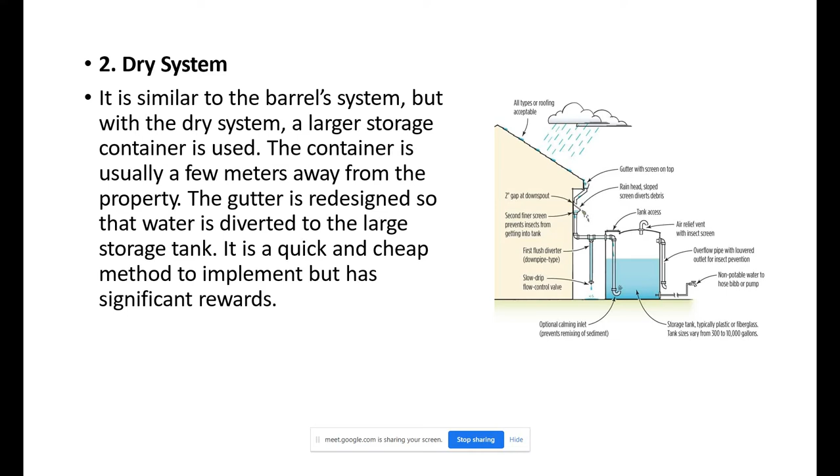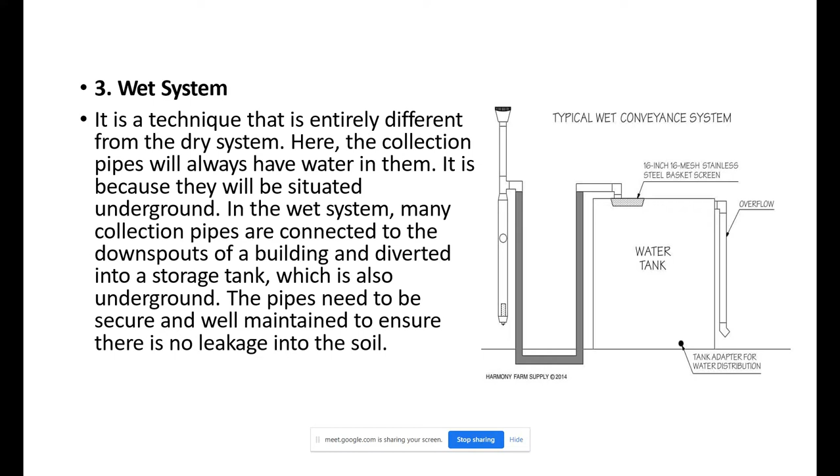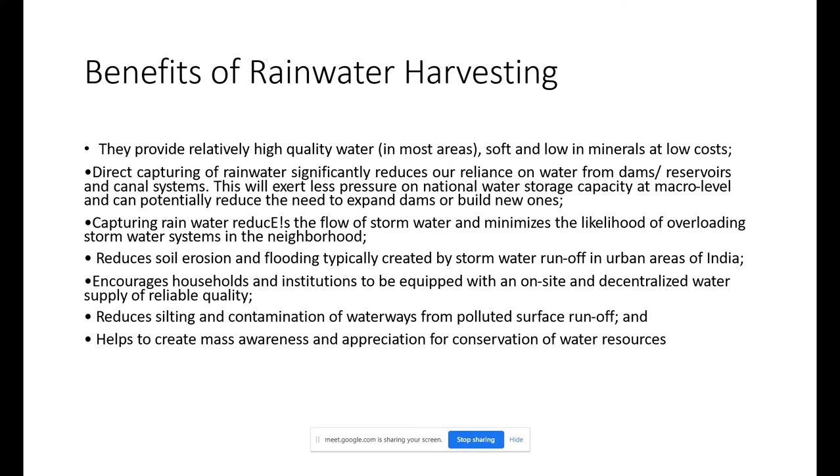So let me tell you the benefits of rainwater harvesting. They provide relatively high quality water, soft and low in minerals, at low cost. Capturing rainwater reduces the flow of stormwater and minimizes the likelihood of overloading stormwater systems in the neighborhood. It reduces soil erosion and flooding typically created by stormwater runoff in urban areas of India. It reduces silting and contamination of waterways from polluted surface runoff, and helps create mass awareness and appreciation for conservation of water resources. So that was all about my presentation.

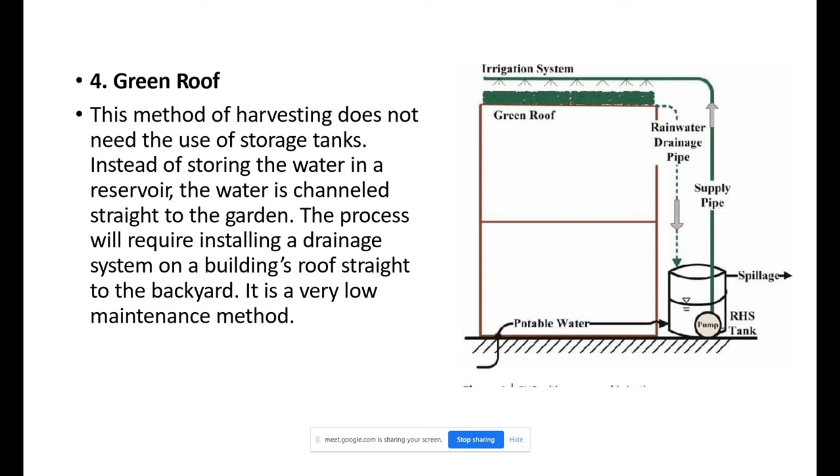Okay, do you have any thought? Yes, ma'am. In our houses we can use tanks to store water, and then we can reuse it again and again.

Okay. Something like rain barrels. Okay.

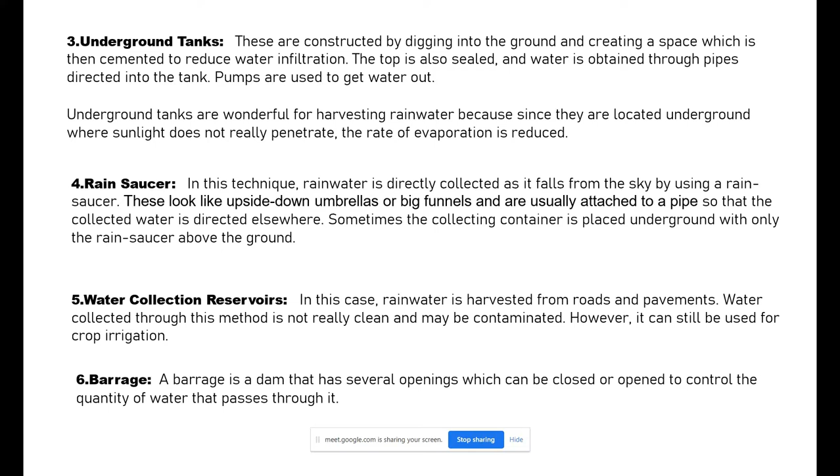Next is barrage. A barrage is a dam that has several openings which can be closed or opened to control the quantity of water that passes through it.

Now moving to the advantages of rainwater harvesting. The first one is easy to maintain. Systems for the collection of rainwater are based on simple technology. The overall cost of their installation and operation is much lesser than that of water purifying or pumping systems. Maintenance requires little time and energy. The result is the collection of water that can be used in substantial ways even without purification.

Second is independent water supply. Rainwater harvesting provides an independent water supply where clean water is costly or difficult to come by. Rainwater harvesting is a critical source of clean water and increases the quantity of potable drinking water available.

Third is reducing water bills. Water collected in the rainwater harvesting system can be put to use for several non-drinking functions as well. For many families and small businesses, this leads to a large reduction in their utility bill.

Fourth is suitable for irrigation. Rainwater is free from many chemicals found in groundwater, making it suitable for irrigation and watering gardens.

Fifth is reduces demand on groundwater. With an increase in population, the demand for water is also continuously increasing. The result is that many residential colonies and industries are extracting groundwater to fulfill their daily demands.

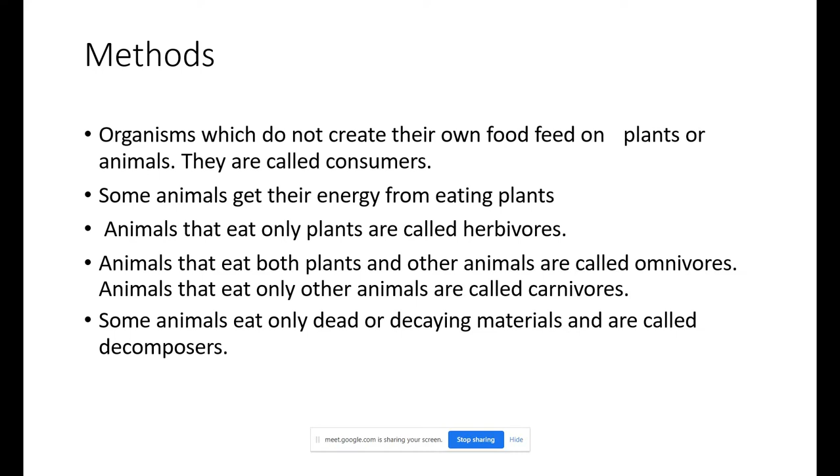The second benefit is the ecological benefit. As we have gained water from the rain, we can use it to recharge the underground water. The ecological benefits of rainwater harvesting are immense. It minimizes the impacts of flooding by funneling the rainwater into large tanks.

For example, when rain occurs, it usually causes soil erosion when the rain force is huge, so we can use that water to store and avoid soil erosion. It also acts as an adequate means for irrigation purposes, like growing crops and various other uses, and it also reduces the demand on groundwater, as people will need less water from the ground.

Extending this further, we have a similar topic: water resource management. Till now we have discussed what rainwater harvesting is, and now we will discuss water resource management. If we already have some water, how can we manage those water resources to use it to its full potential while minimizing water demand.

It is basically an activity of planning, developing, distributing, and managing the optimum use of water resources. The keyword here is optimum - how we can utilize the current water resources to its best. It is a subset of water cycle management, like hydrology, but the scale of management is low.

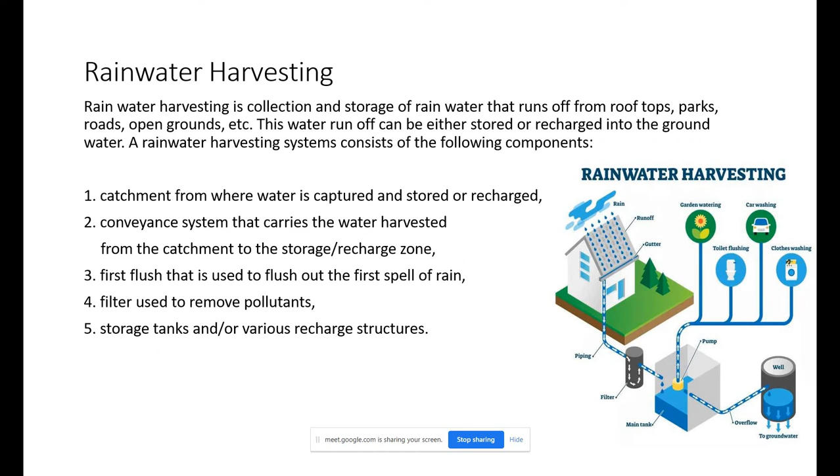The second step we can perform is, at our household level, make efficient use of water, the optimum use of water resources. So what we can do in our households is reuse water—for example, we get rainwater, and we can make a funneling system so that we can store that water and use it for common purposes.

And the third step we can do is host small public events, like in a society, where we can encourage people to help build better infrastructure for water resource management.

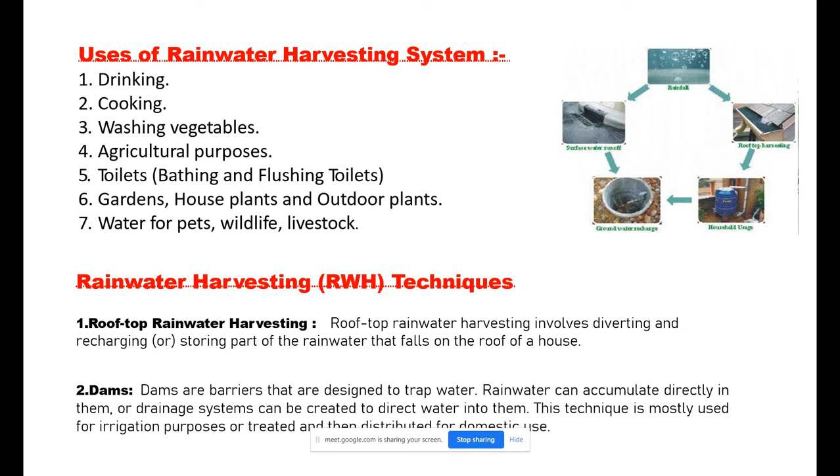What are the advantages of rainwater harvesting? It is easy to maintain. The overall cost of installation and operation is much lesser than that of a water purifying or pumping system.

Independent water supply. Rainwater harvesting provides an independent water supply where clean water is costly or difficult to come by, reducing water bills. Water collected in the rainwater harvesting system can be put to use for several non-drinking functions.

Suitable for irrigation. Rainwater is free from many chemicals found in groundwater, making it suitable for irrigation and watering gardens. Reduced demand on groundwater: with increase in population, the demand for water is also increasing, resulting in many residential colonies and industries extracting groundwater.

During the rainy season, rainwater is collected in large storage tanks. It also helps in reducing flooding in some low-lying areas.

What are the disadvantages of rainwater harvesting? It has unpredictable rainfall, initial high cost, storage limits, and certain roof types may seep chemical or animal droppings contaminate the water.

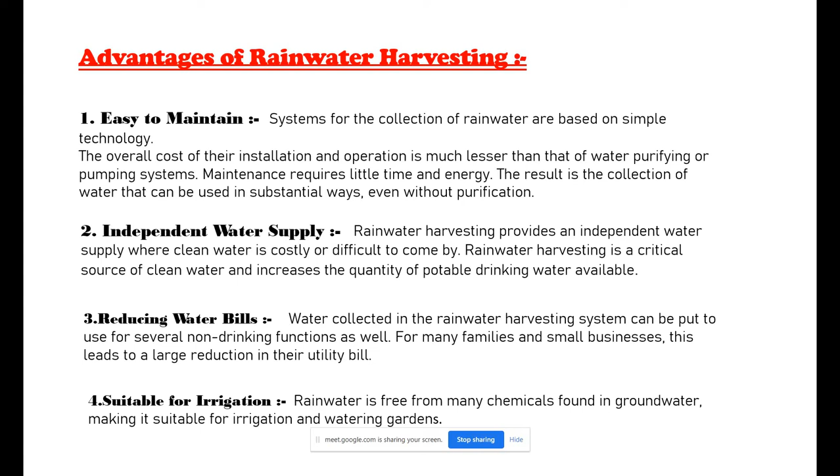Okay, how are you going to contribute, ma'am, in this area, Shivam?

Yes, ma'am. Do you have any suggestion for better water resource management?

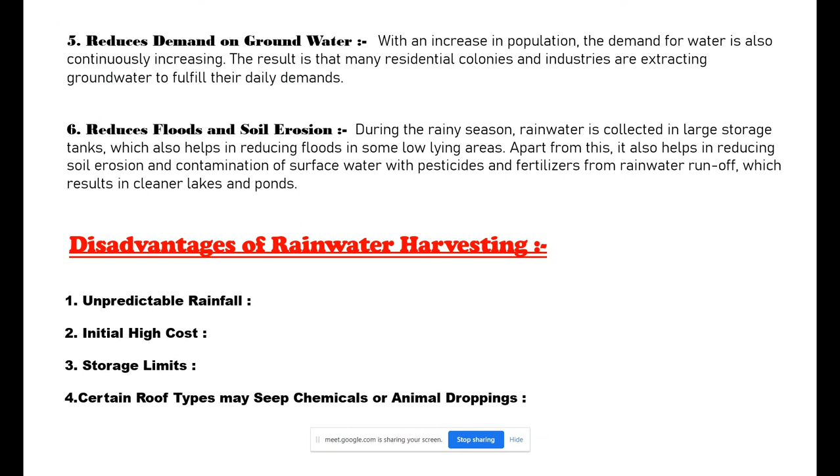Ma'am, every village house should have a rainwater harvesting system in their houses, and we can also dig.

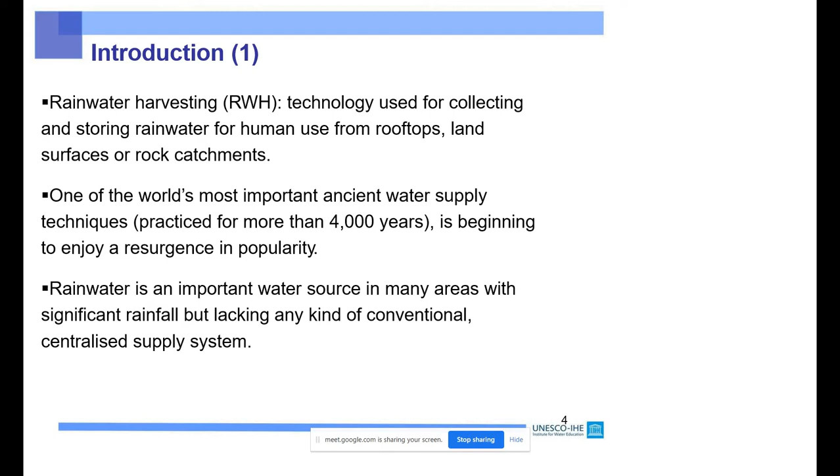Rainwater is also a good option in areas where good quality fresh surface water or groundwater is lacking. It could be used as a supplement to piped water supply, for example for toilet flushing, washing, and garden spraying.

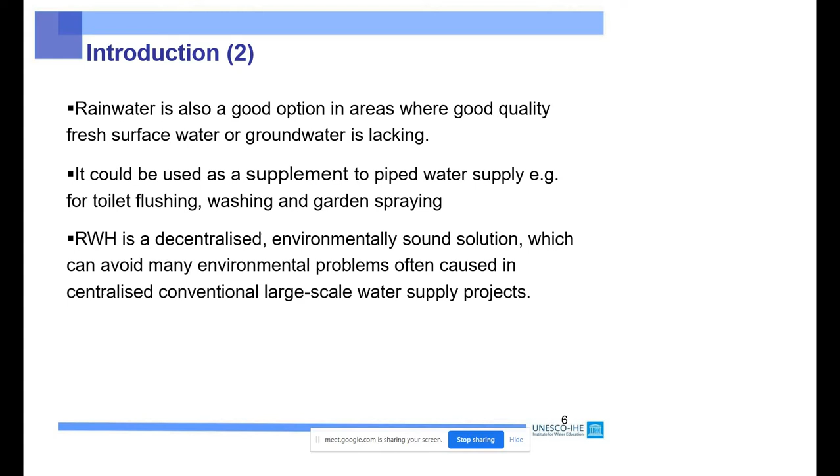Types of rainwater harvesting systems: roof catchment, a simple roof water collection system for households; large systems for educational institutions; roof water collection systems for high-rise buildings in urbanized areas; ground catchment; rock catchment; and collection of storm water in urbanized catchments for recharge. So here are some diagrams.

How about several types of rainwater harvesting. First one is domestic, which we can use in our home for storing rainwater.

Ma'am, yes, please. So here you can see there is a storage tank and the water from the roof seeps down to this tank, and this water can be used in washing, agriculture, for flowers, or for water uses anywhere.

And then comes the ground catchment system. Here a huge soil area is used to collect the water. And then the ground catchment system and rock catchment system.

In the rock catchment system, the reservoir is high above, on the rocky catchment surface, and then this water reservoir is used to supply water to the cities or any village.

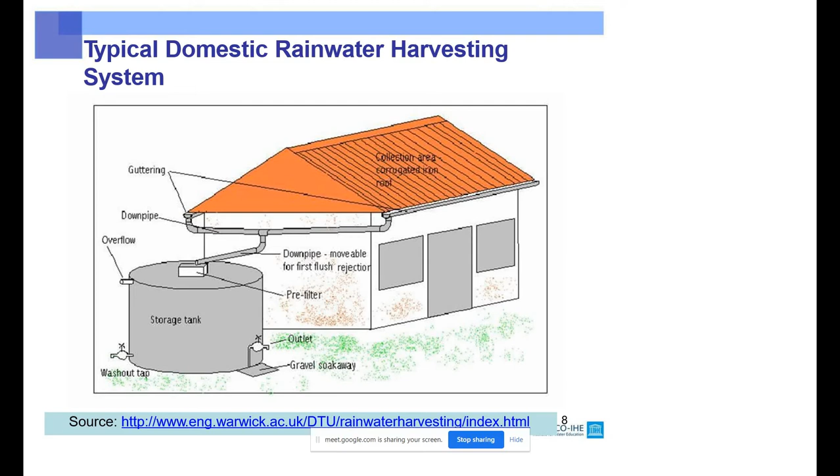Ma'am, next slide. What is the ground catchment system, ma'am, please?

Ma'am, here the used land area is used to collect the water, and then this collected water is stored into the ferro cement tank. This is a cemented area, I think.

Yes, ma'am. This is an underground tank, and the land above it collects the water, or the slope type area. Ground catchment system.

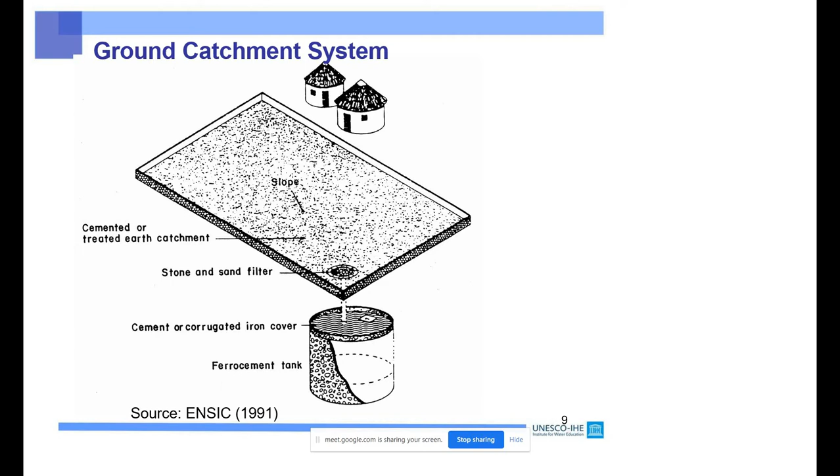This is the structure showing how we can make that land store more water. This is the diagram. Next.

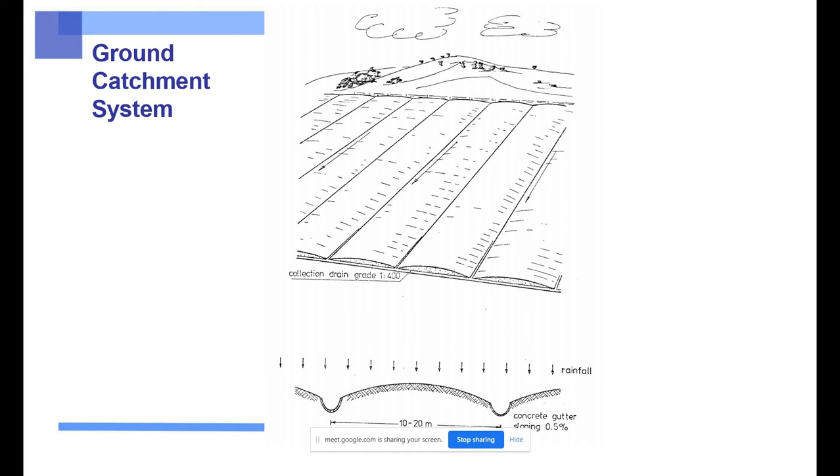This is the rock catchment system. Here the reservoir is above the land, at a higher sea level, and the water from this reservoir gets to different villages and cities. Next.

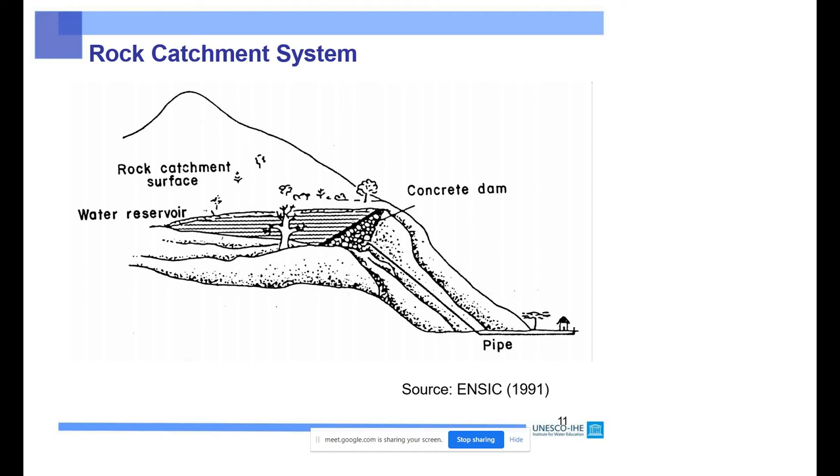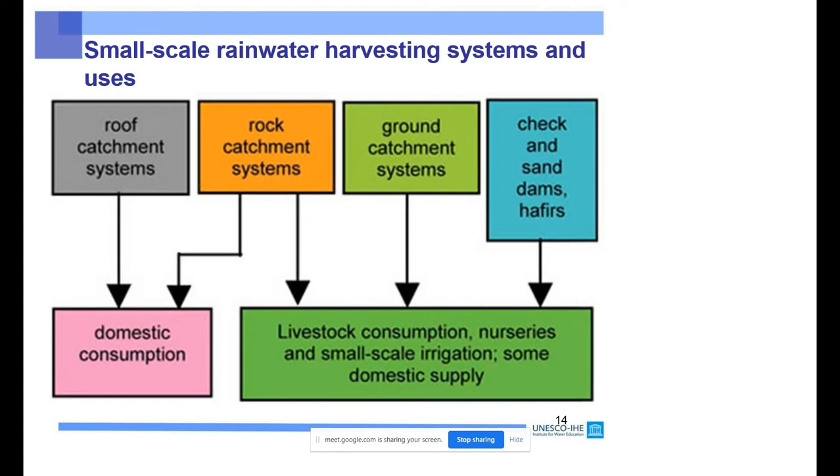So I think everyone has discussed about that. Yes. Next. Ma'am, next.

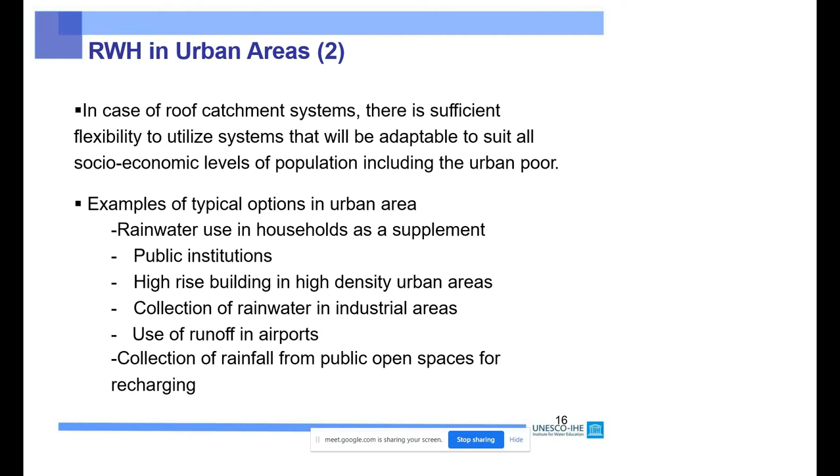In case of roof catchment systems, there is sufficient flexibility to utilize a system adaptable to suit all socio-economic levels of population, including the urban poor. Examples of typical options in urban areas: rainwater used in households as a supplement, public institutions, and high-rise buildings in high-density urban areas.

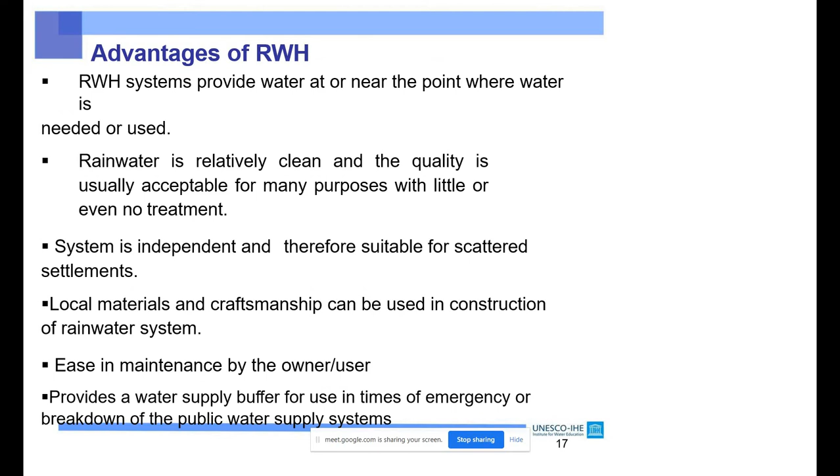Advantages of rainwater harvesting: the system provides water at or near the point where it is needed or used. Rainwater is relatively clean and usually acceptable for many purposes with little or no treatment. The system is independent and therefore suited for scattered settlements, with ease of maintenance by owner and user.

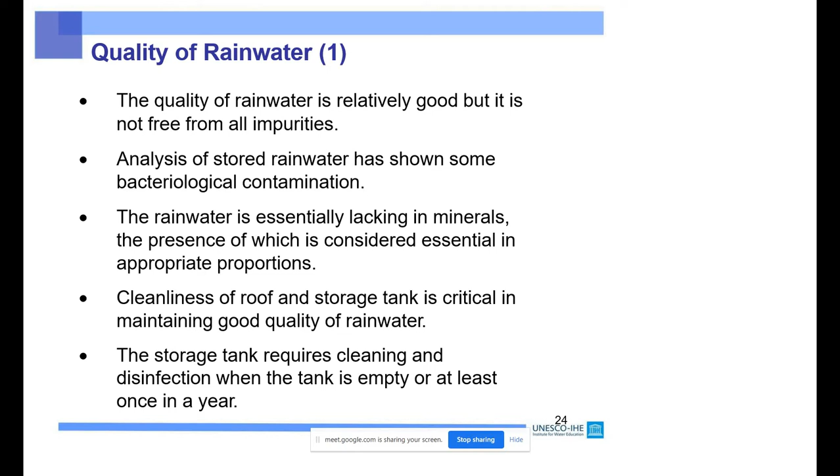Public awareness and education are essential in order to improve acceptance of rainwater collection.

...in the ground stores the water, which can be used at times when there is water scarcity or no rainfall.

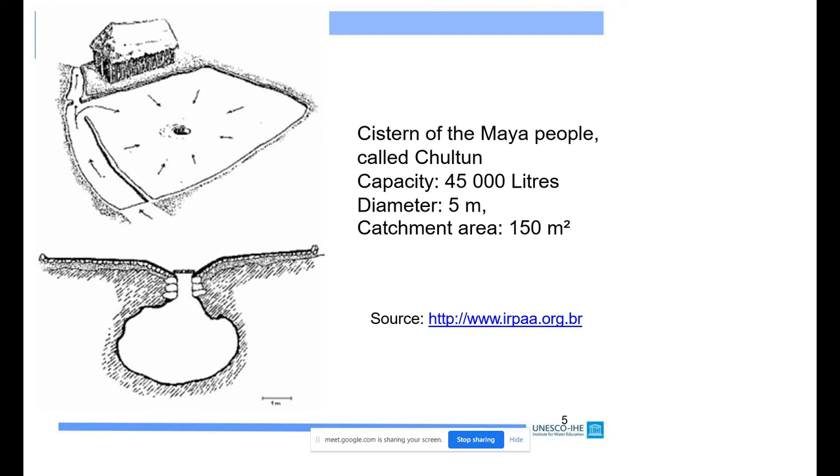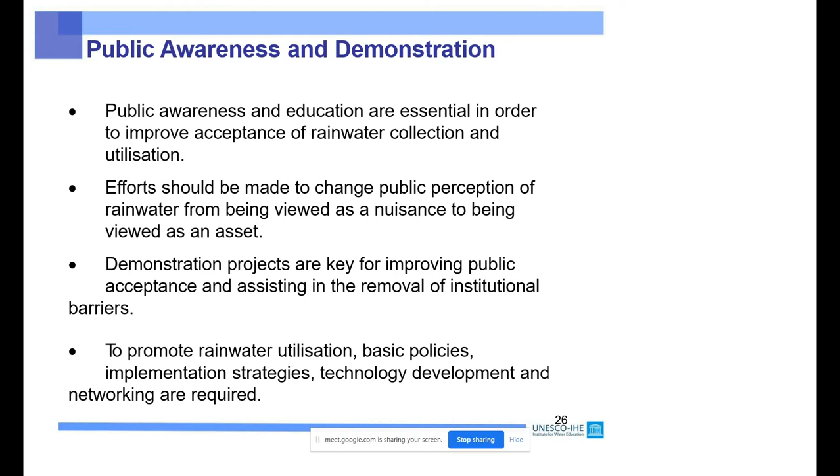Do you have any suggestion? My suggestion is that more and more people should try rainwater harvesting in their homes or big buildings, so that the groundwater level is maintained. Otherwise, if we keep using groundwater at this speed, it will get depleted very soon. So this is a very important time, and you have to spread awareness for this.

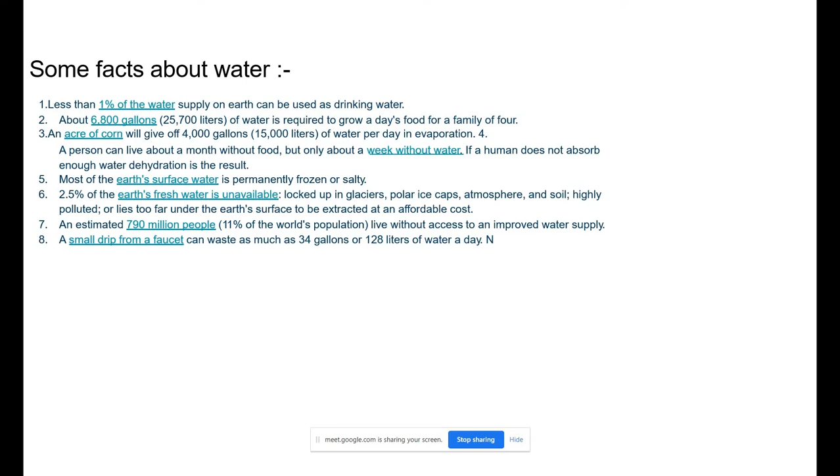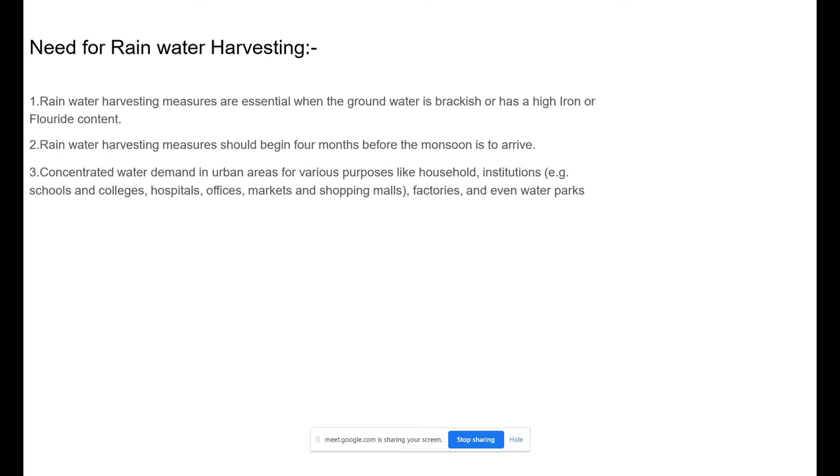What is the need for rainwater harvesting? Rainwater harvesting measures are essential when groundwater is brackish or has high iron or fluoride content. These measures should begin 4 months before the monsoon arrives, due to concentrated water demand in urban areas for households, institutions, factories, and even water parks.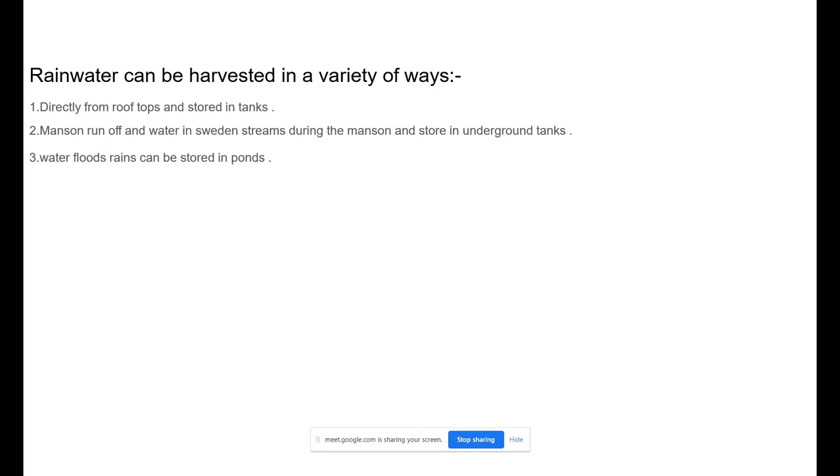Rainwater can be harvested in a variety of ways. First, directly from rooftops and stored in tanks. Second, monsoon runoff and water in streams during the monsoon stored in underground tanks. Third, water from flood drains can be stored in ponds.

The benefits include: less cost, helps in reducing the water bill, decreases demand for water, reduces the need for imported water, and promotes both water and energy conservation. It improves the quality and quantity of groundwater, does not require a filtration system for landscape irrigation, and this technology is relatively simple, easy to install and operate. It reduces soil erosion, storm water runoff, flooding, and pollution of surface water with fertilizers, pesticides, metals, and other sediments.

The last point is that it is an excellent source of water for landscape irrigation, with no chemicals or dissolved salts, and free from all minerals.

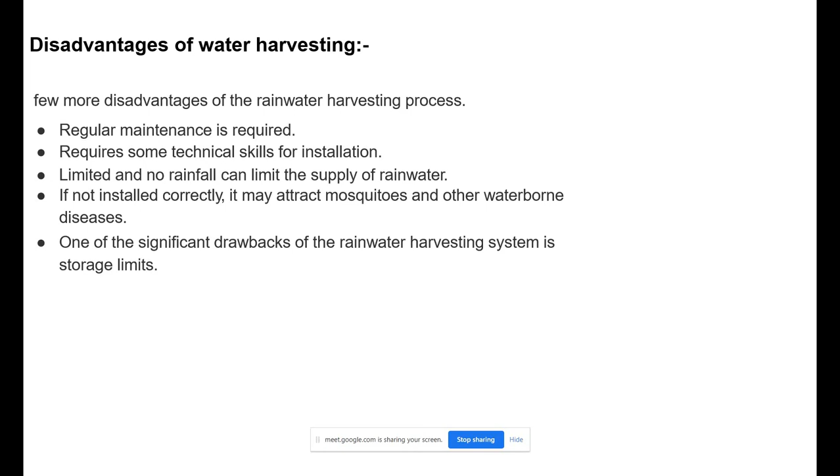Yes ma'am, good afternoon ma'am. Today's topic presented is rainwater harvesting and management of water resources.

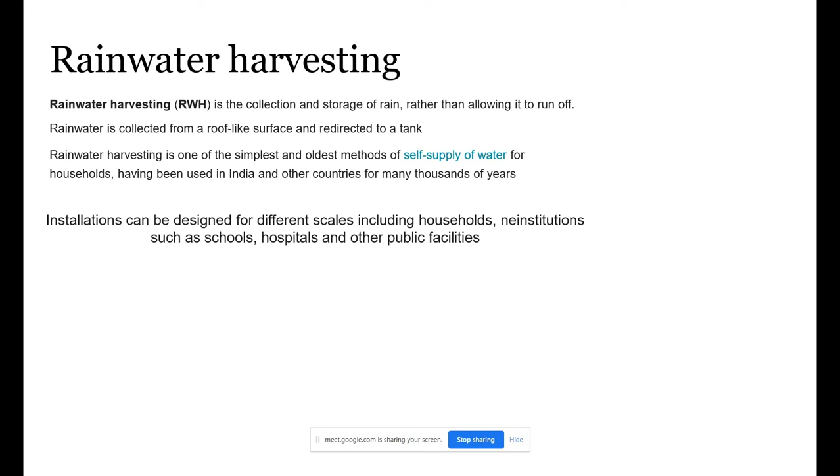Firstly, what is rainwater harvesting? Rainwater harvesting is the collection and storage of rain rather than allowing it to run off. Rainwater is collected from a roof-like surface and redirected to a tank. It is one of the simplest and oldest methods of self-supply of water for households, having been used in India and other countries for many thousands of years. Installations can be designed for different scales, including households and institutions such as schools, hospitals, and other public facilities.

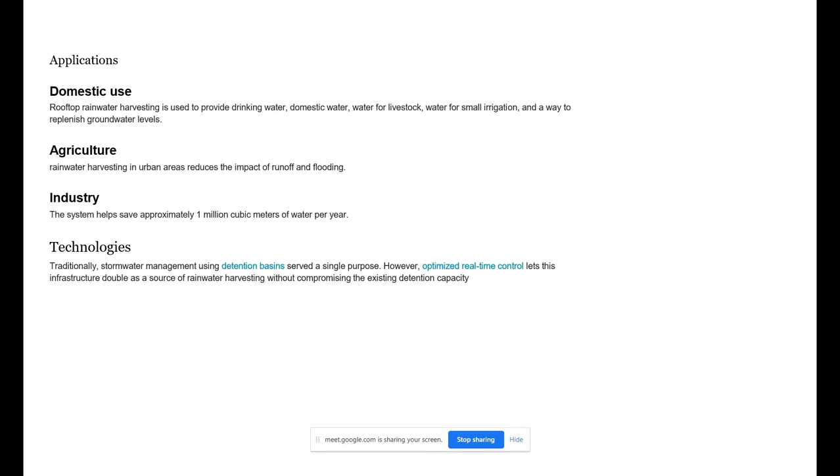Application of rainwater harvesting: domestic use. Rooftop rainwater harvesting provides drinking water, domestic water, water for livestock, water for small irrigation, and a way to replenish groundwater levels. In urban areas it reduces the impact of runoff and flooding. In industry, the system helps save approximately 1 million cubic meters of water per year. Traditionally, storm water management using detention basins served a single purpose, but optimized real-time controls let this infrastructure double as a source of rainwater without compromising the existing detention capacity.

Advantages of rainwater harvesting: it provides independent water during regional water restrictions in developed countries, and is often used to supplement the main supply. It provides water when a drought occurs, can help mitigate flooding of low-lying areas, and reduces demand on wells, which may enable groundwater levels to be sustained. It increases the availability of water during dry seasons by raising the level of dried bore wells and wells. Surface water supply is readily available for various purposes, thus reducing dependence on underground water.

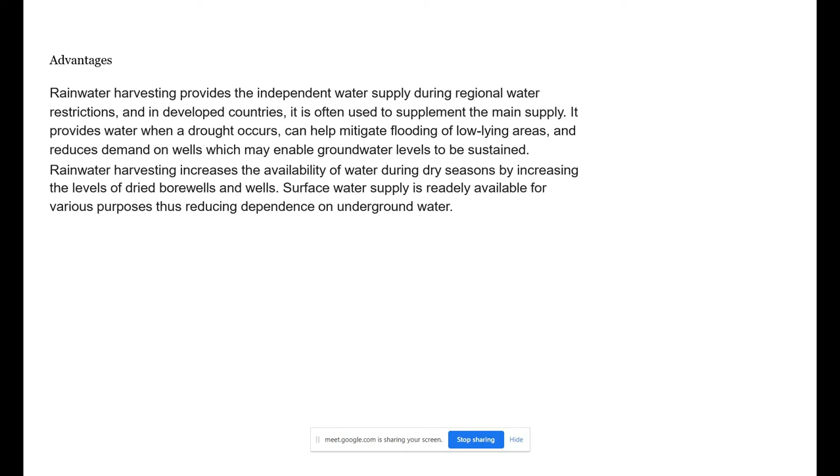Limitation of rainwater harvesting: it is a widely used method of storing rainwater in countries with drought characteristics. Several pieces of research have developed different criteria and techniques to select suitable sites for harvesting rainwater. Some research identified suitable sites for the potential erection of dams. The South African Water Research Commission has supported research into rainwater harvesting; studies in arid, semi-arid, and humid regions have confirmed that techniques such as mulching, pitting, ridging, and modified run-on plots are effective for small-scale crop production.

Thank you ma'am. Okay, do you have any suggestion?

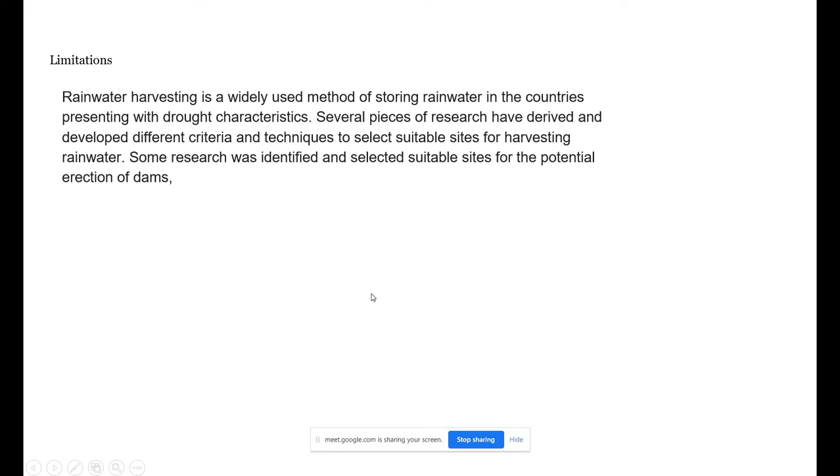Ma'am, in our homes we make tanks to store the rainwater.

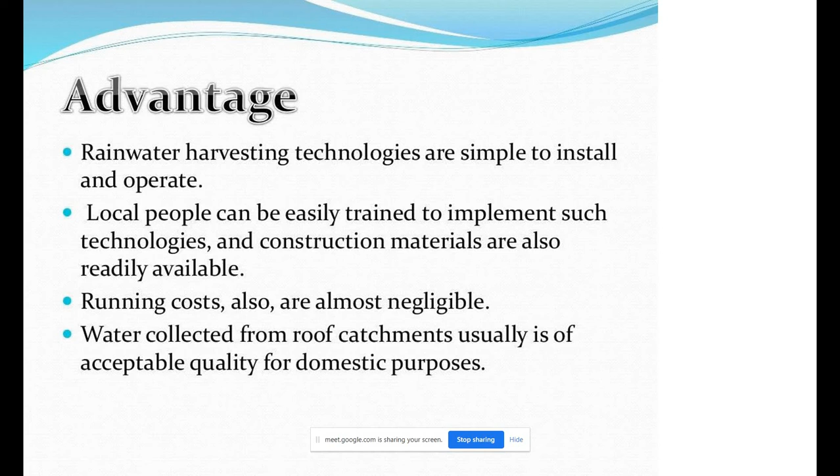Now, how can we harvest rainwater? There are two ways: first is surface runoff harvesting, and second is rooftop rainwater harvesting. In urban areas, rainwater flows away as surface runoff. This runoff could be caught and used for recharging aquifers by adopting appropriate methods.

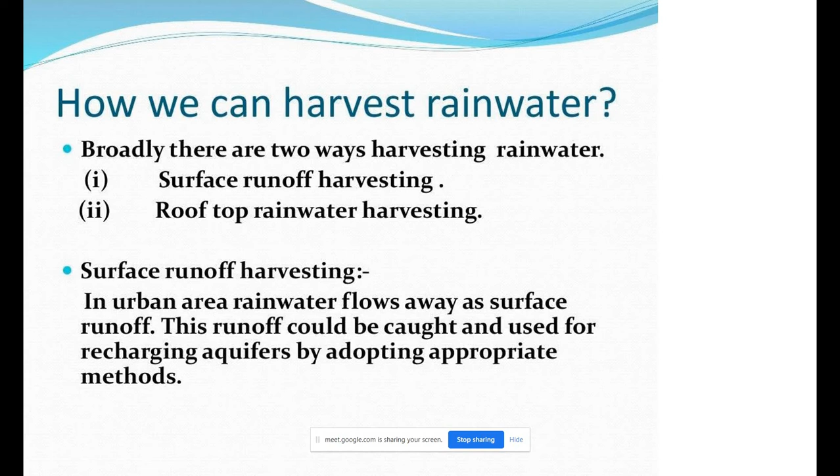Now let's see rooftop rainwater harvesting. It is a system of catching rainwater where it falls. In rooftop harvesting, the roof becomes the catchment and the rainwater is collected from the roof of the house or building. This method is less expensive and very effective.

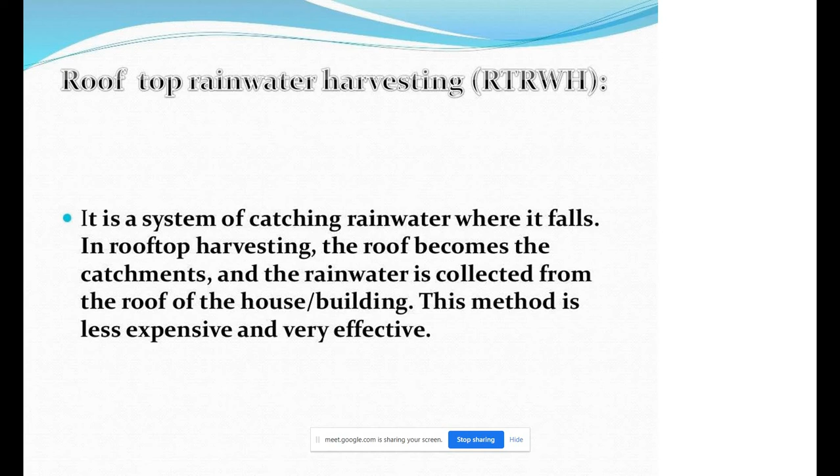Now let's see the components of rooftop rainwater harvesting: first is catchment area, second transportation, third first flush, fourth storage system, fifth delivery system, and sixth is filtration system.

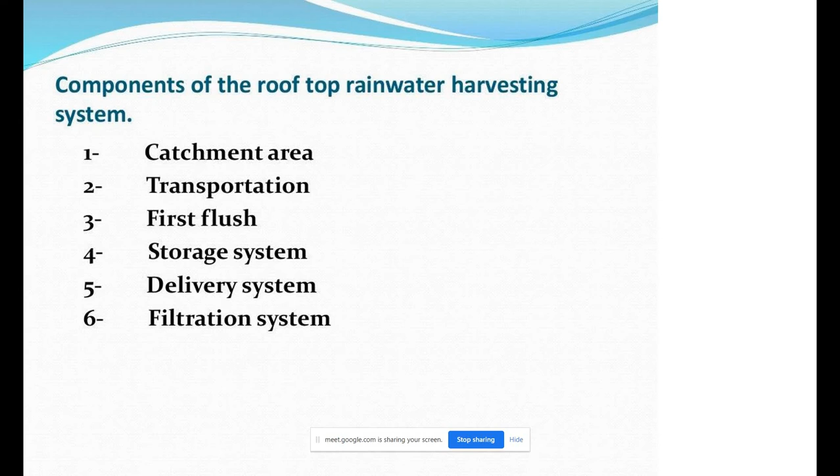Now let's see the figure of catchment area. This is the figure for catchment area where water is stored on top of the house, and then transportation, where the water from the top is stored in the ground.

This is transportation. First flush is a device used to flush off the water received in the first shower. The first shower of rain needs to be flushed off to avoid contaminating storable or rechargeable water by probable contaminants from the atmosphere and the catchment roof. It also helps in cleaning silt and other material deposited on the roof during the dry season. Provisions for a first rain separator should be made at the outlet of each drain pipe.

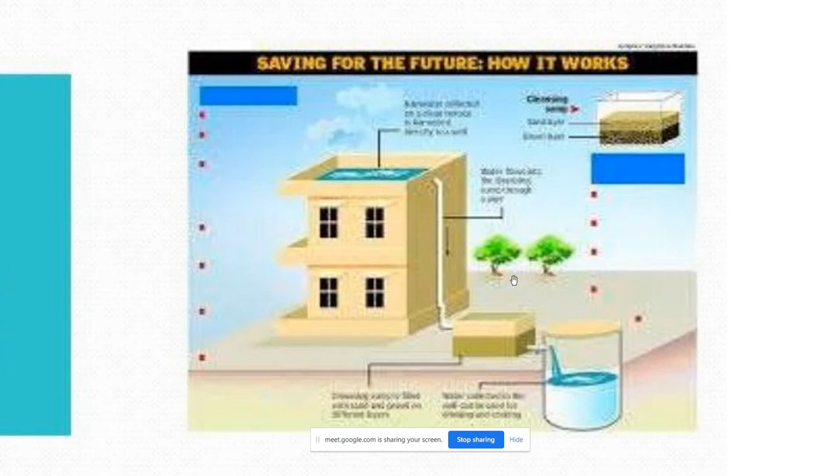Now let's see the storage system. Here is the image for the storage system, showing how we store the water in the ground. After that, the delivery system shows how water is stored in tanks.

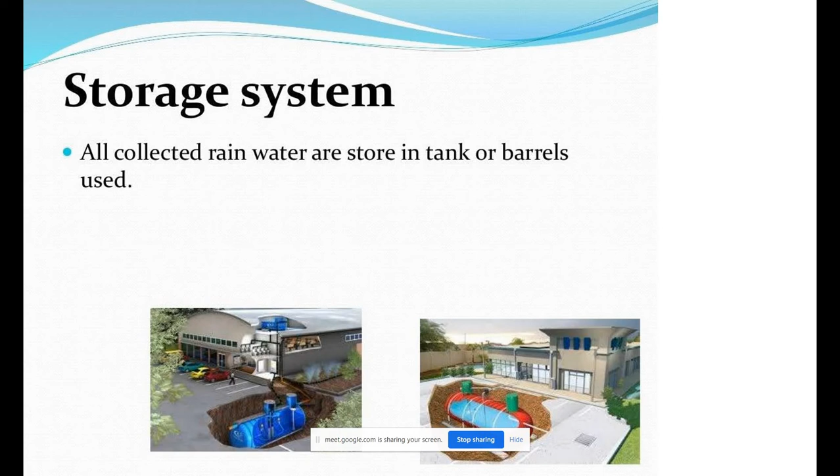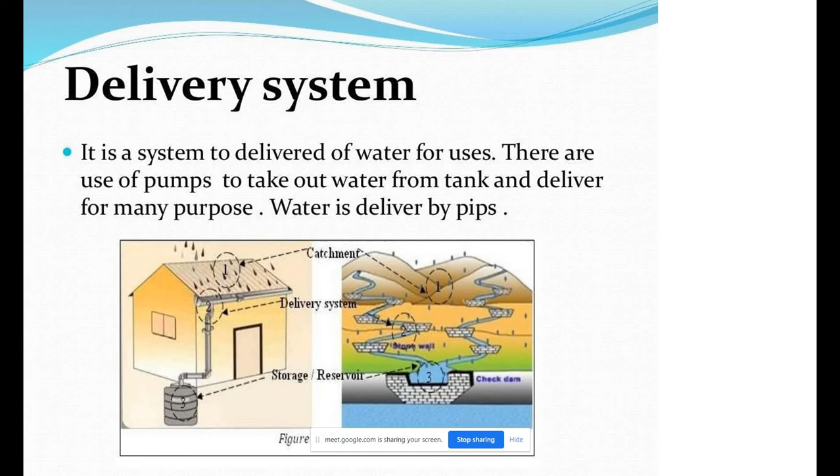Filtration is used for treatment of water to effectively remove turbidity, color, and microorganisms. After the first flush of rainfall, water should pass through filters. There are different types of filters in practice, but the basic function is to purify water. Here are some techniques of filtration: first is the sand gravel filter.

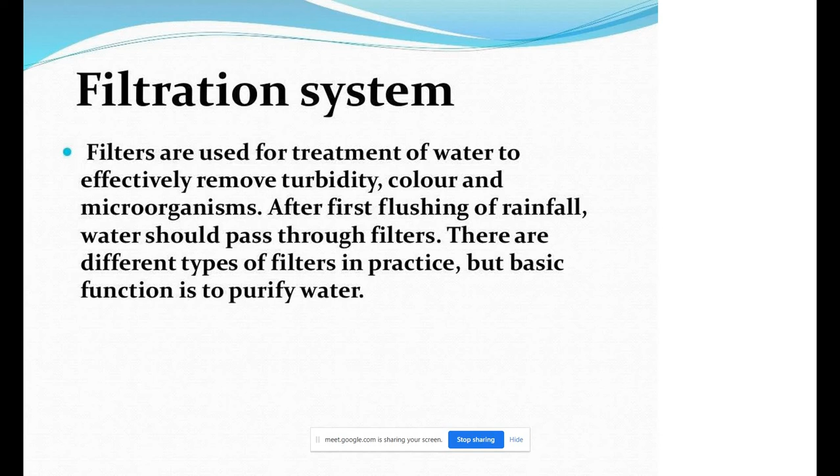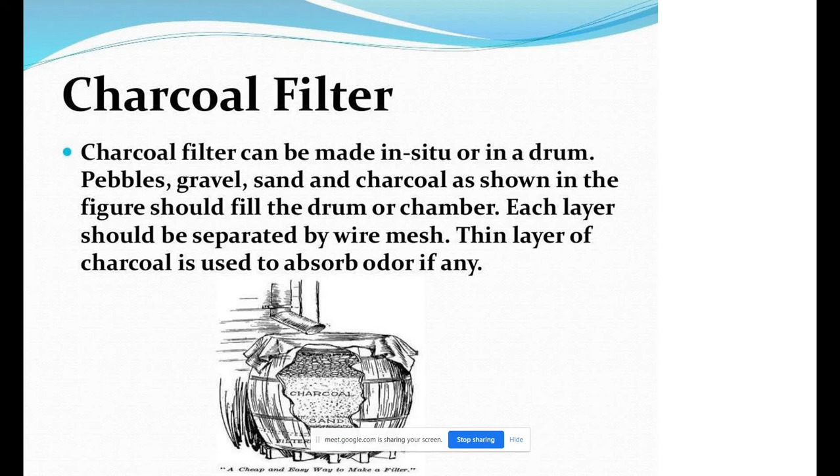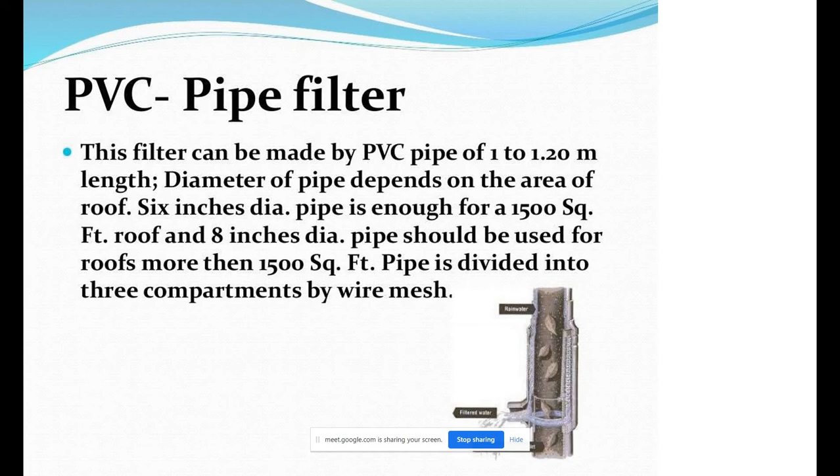Why do people harvest rainwater? Rainwater is a precious resource due to increase in demand from our ever-growing population. Changes in rainfall patterns in the UK have seen both drought conditions and flooding. Rainwater harvesting can provide around 50% of family water needs. This not only saves water but saves money and reduces our impact on the environment. To inculcate a culture of water conservation and reduce soil erosion, rainwater harvesting is compulsory.

Okay, how are you going to contribute in this area, Aman?

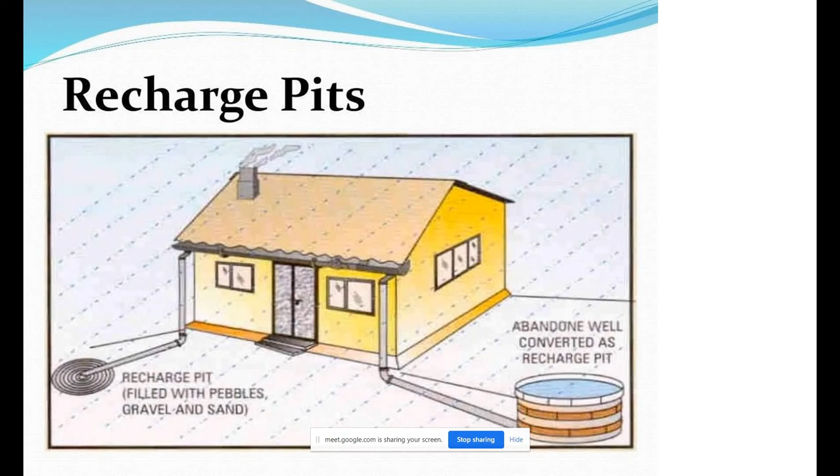Yes ma'am, there is a ground already in my area where all the water from domestic purposes is stored, and which is again refilled in the groundwater.

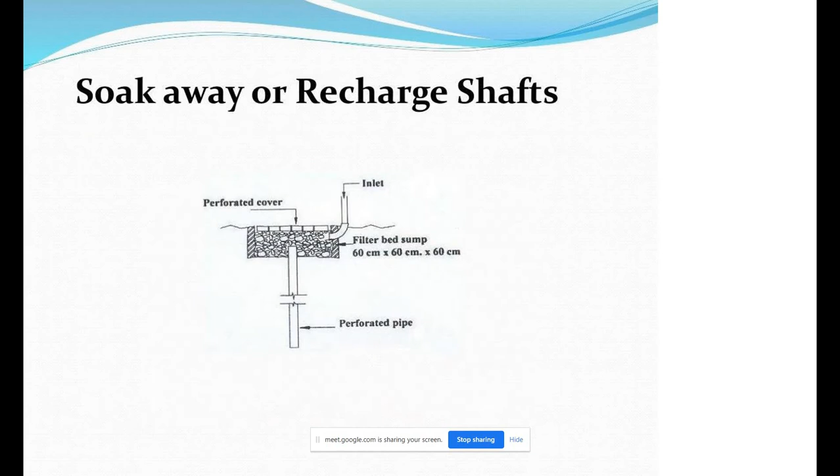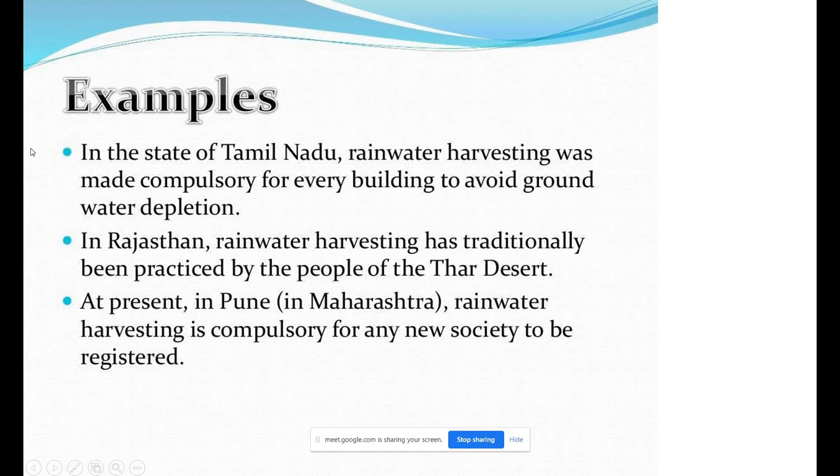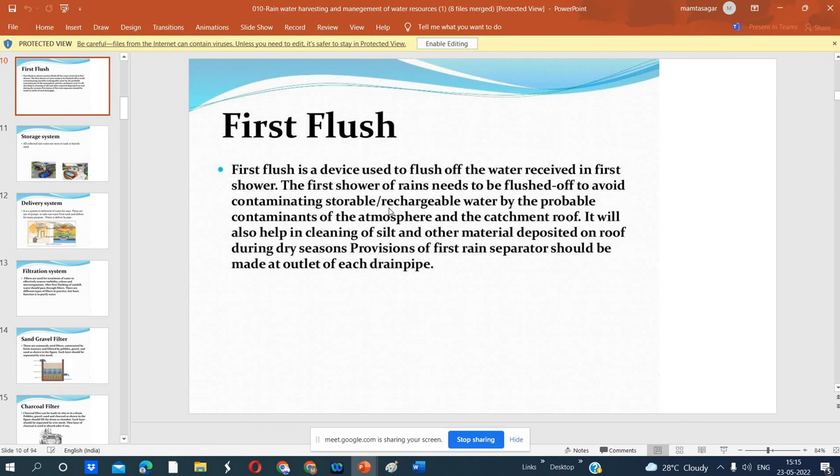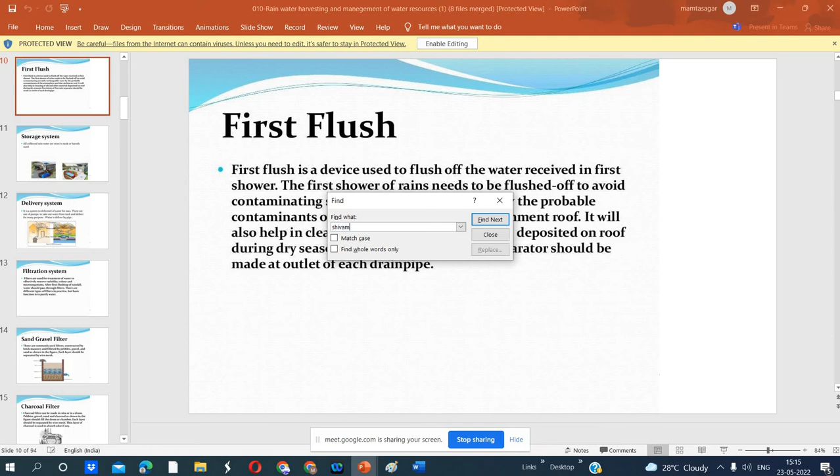Okay, now it is over. Okay, thank you Shivam Verma, roll number 58. Is your slide here or not? Presentation, yes ma'am, present. Is your PPT here in this slide or not? Where is it? Yes ma'am, PPT present ma'am. In the meantime I am asking from you. What's your name? Shivam Verma. Do we have the slide of Shivam Pandey? I don't have your slides. Ma'am, there are slides of Shivam Verma. Okay, but I think it is not here. Ma'am, I have submitted the slides in Google Classroom. When did you submit? Ma'am, yesterday. Okay, these are the previous slides, huh? Shivam Pandey, so only Shivam Pandey's presentation is here. This is the presentation of... okay, what is your roll number? 58. 58, okay.

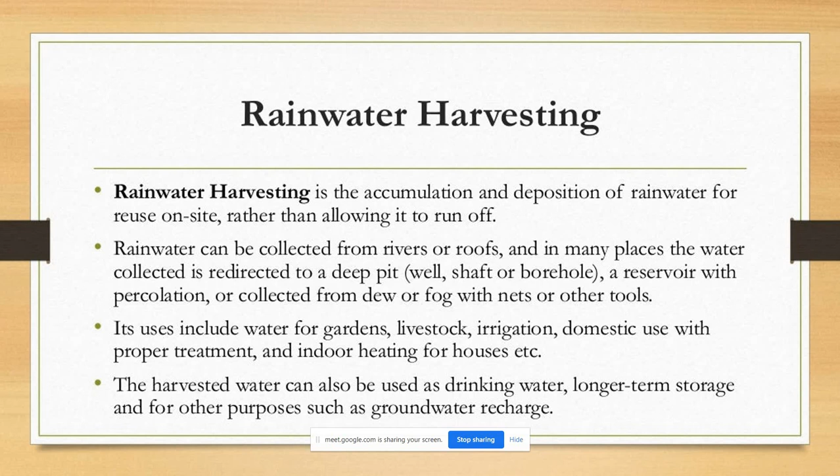Ma'am, can you skip to the next slide? Methods of rainwater harvesting slide. This is your slide, no? Method, components of roof. Method of rainwater harvesting. Second slide. Ma'am, it is the third slide.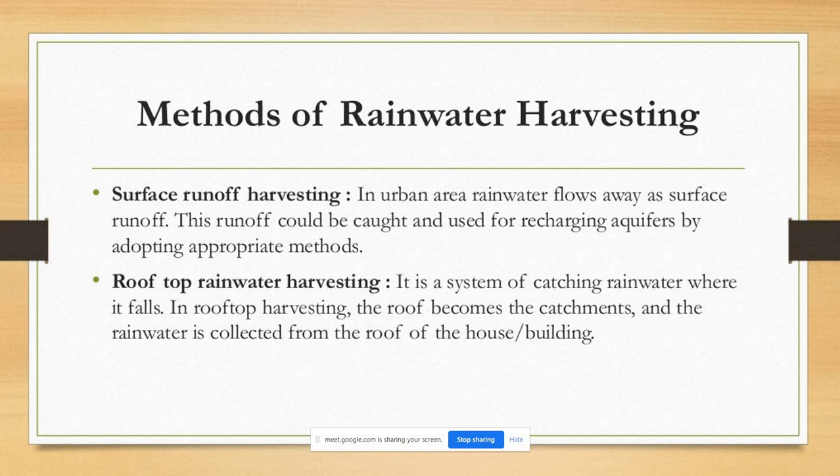Ma'am, next slide. First flush is a device used to flush off the water received in the first shower. In the filter, there is always some skepticism regarding rooftop rainwater harvesting since doubts are raised that rainwater may contaminate groundwater. Filters are used for treatment of water to effectively remove turbidity, color, and microorganisms.

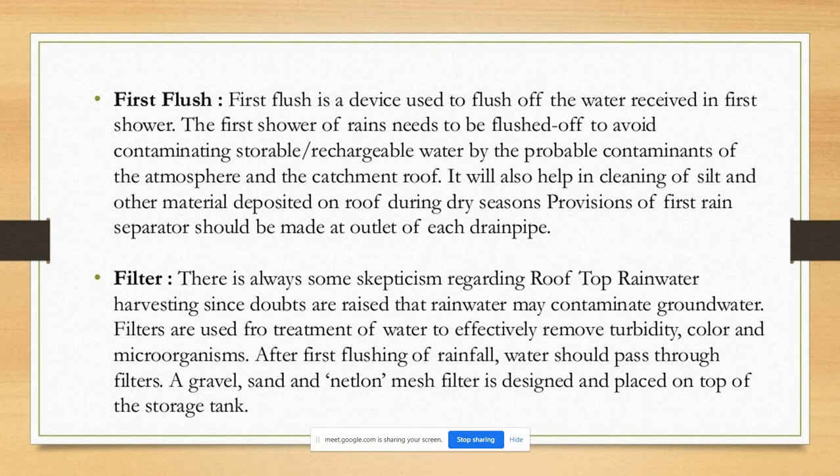Ma'am, next slide. Quality: the concentration of contaminants is reduced significantly by diverting the initial flow of runoff water to waste. Supplying rainwater that has gone through preliminary filtration measures for non-potable water uses such as toilet flushing, irrigation, and laundry may be a significant part of a sustainable water management strategy.

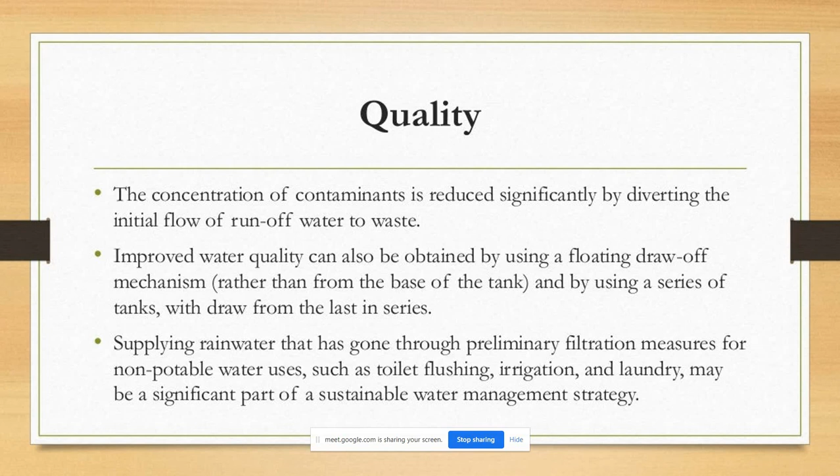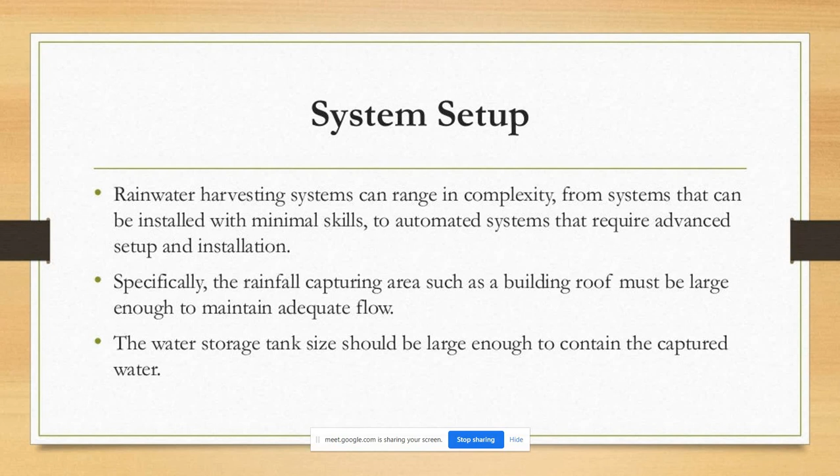Next slide. System setup: rainwater harvesting systems can range in complexity from systems that can be installed with minimum skill to automated systems that require advanced setup and installation. Specifically, the rainfall capturing area, such as the building roof, must be large enough to maintain adequate flow. The water storage tank should be large enough to contain the captured water.

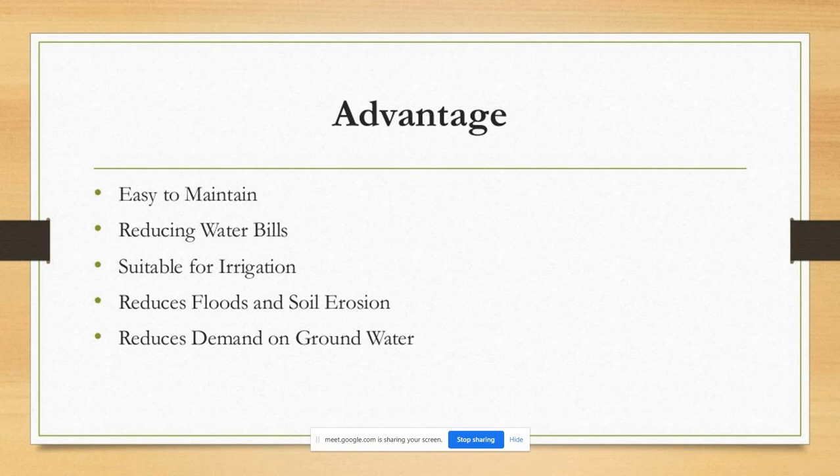The advantages are: easy to maintain, reducing water bills, suitable for irrigation, reduces floods and soil erosion, reduces demand on groundwater. The disadvantages are: unpredictable rainfall, initial high cost, and regular maintenance required. Thank you, this is my slide.

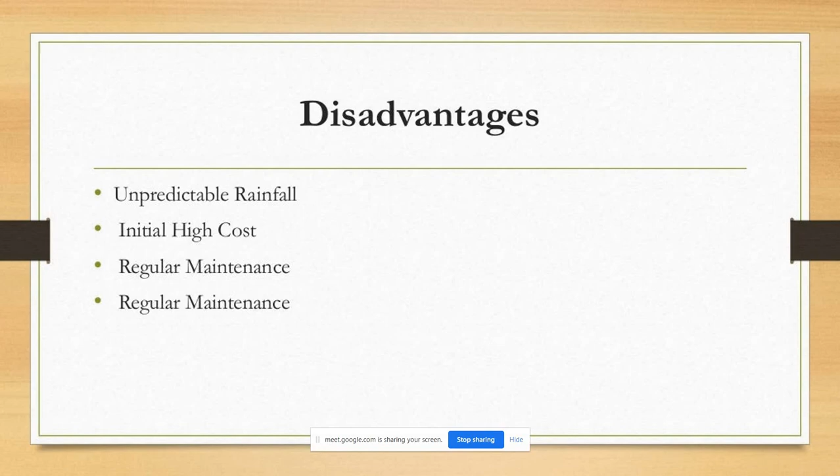Okay, how are we going to contribute in this area, Shivam? By collecting the rainwater for future use, by diverting the spout onto our lawn and garden, preventing this water from running away unused, and using it for future purposes.

Actually, we are aware of this system, but we are not using it much. Only a few people are using this system. So what are you going to do about this? We can create a large storage tank using the soil to store the water, and use it on a daily basis.